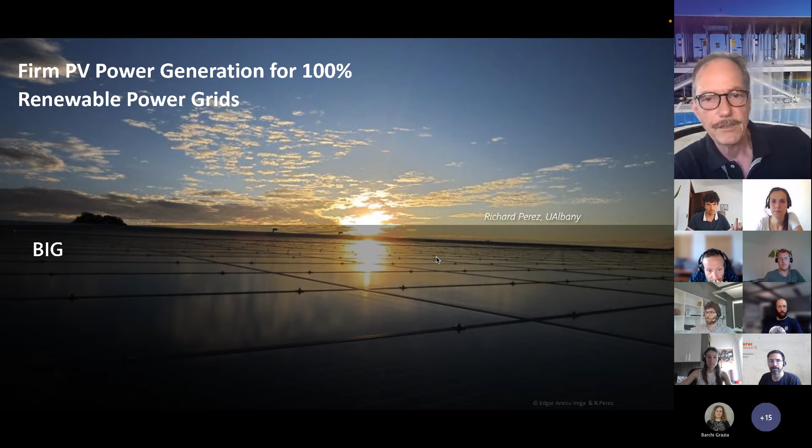Yes. Okay. So firm PV power generation for 100% renewable power grids. And I'll summarize that in 3 words. Solar is big, PV is a big resource. It is getting to be very inexpensive, and most importantly, it's a resource that can be made available all the time, at night and in winter.

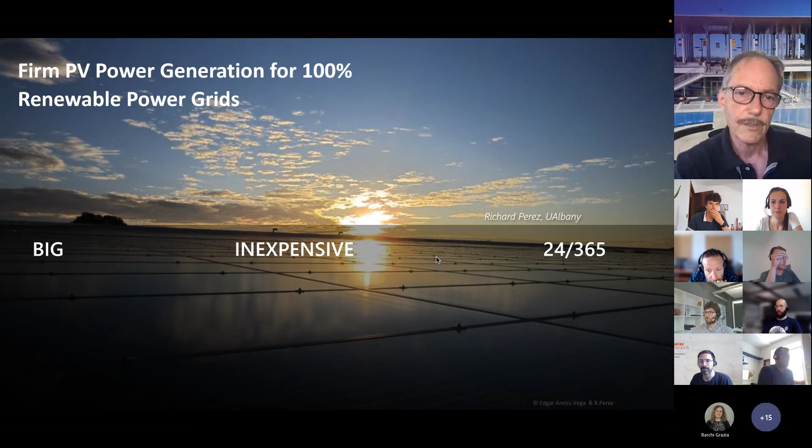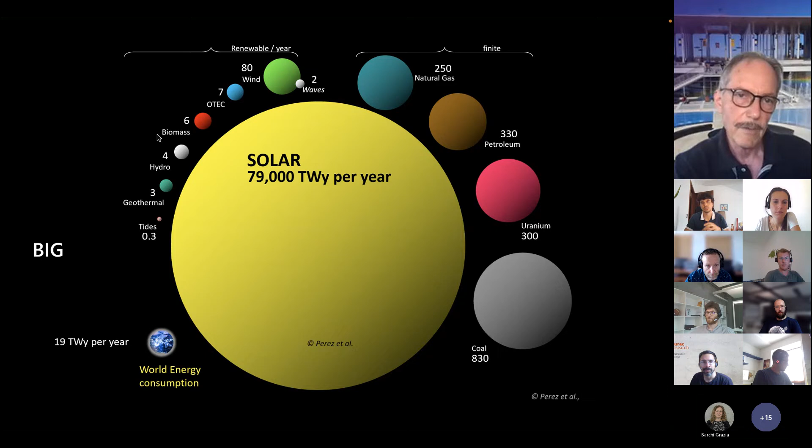So big, if you compare the energy reserves of the planet, you see that solar is so much bigger than the reserves that we have for conventional resources on the right that power the economies of the world. And it's also much bigger than all the renewables, which happen to be byproducts of solar. So PV can do the job. There is enough. There is more than 4,000 times enough to power our consumption, which is illustrated by that little blue sphere here. So no problem, it's big.

This is a chart I like to look at. It's published by the Lazard Bank every year, but Bloomberg has something similar where they compare the levelized cost of energy for all resources capable of making electricity. And PV is getting very cheap. On the x-axis is the unsubsidized cost per megawatt hour. If you are used to cents per kilowatt hour, you divide that by 10.

And utility scale PV is among the least cost. If I draw a line here, it's considerably cheaper than new plants of conventional generation, gas peaking, nuclear. Everybody's talking about nuclear in Europe, but it's way too expensive, in my opinion. It's cheaper than coal and even cheaper than combined cycle new generation. It's roughly the same price as fully depreciated plants where you only pay for operational costs. And we are not finished there yet. By 2035, if I take the IEA or Bloomberg predictions, we're going to be right here.

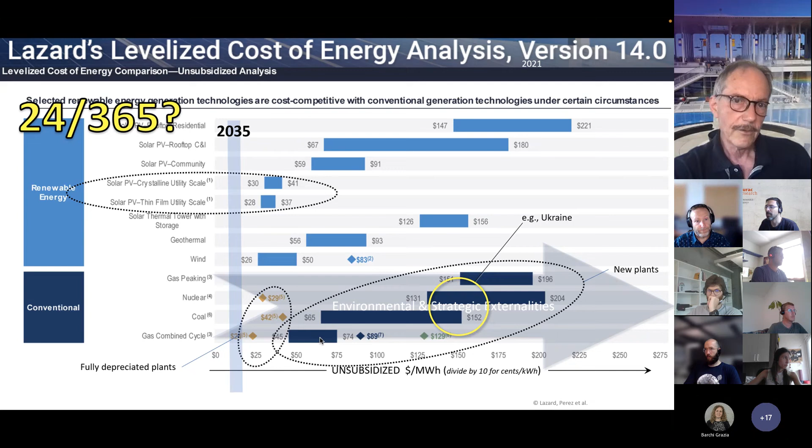But what about 24/365? Because that comparison is not 100% fair. The conventional resources are dispatchable, available on demand, and PV is run by the weather, so it's not available all the time. PV is intermittent, and what we need on the power grid is something that's firm and dispatchable to meet the load all the time.

As a result of that intermittency, PV and wind, for that matter, occupy a marginal position on the grids. What I mean by marginal is this. This is the electrical demand. That's the one of New York City in winter, but it could be any TSO on the planet. And if I operate PV, it operates at the margin. It still floats on a sea of baseload and dispatchable generation to enable it.

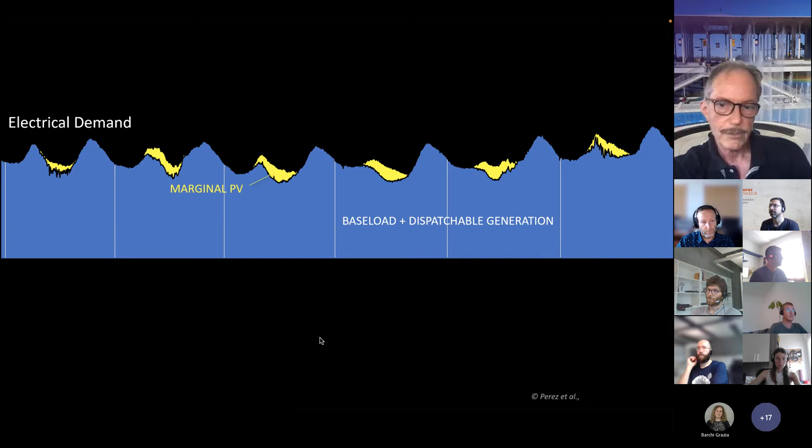And as we grow PV, it remains marginal, and the job of the baseload and dispatchable becomes harder. You need much better forecasts to make sure that everything's balanced, and you need to take care of steeper and steeper ramps, manage the weather. But it's still a marginal approach. You've all heard about the famous duck curves that are growing, started in California, but now spreading all over the planet. And that's only the tip of the iceberg. That's a small part of the problem, what happens within the day.

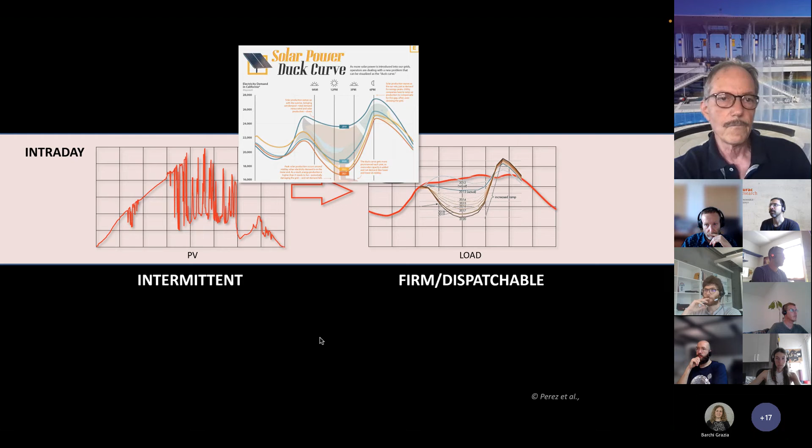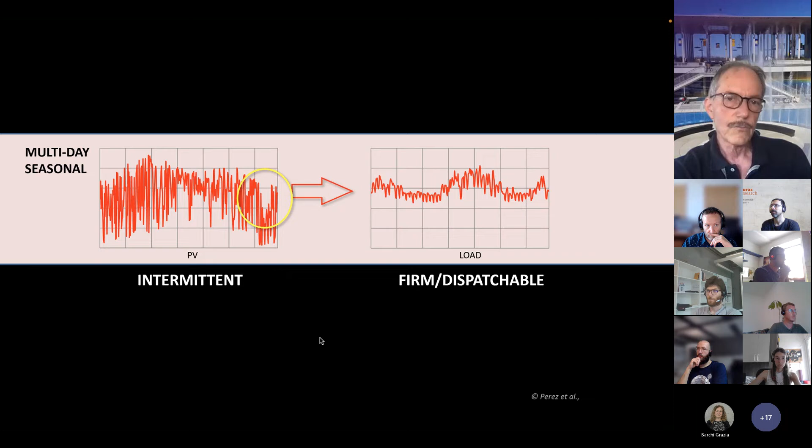The bigger part of the problem is multi-day and it's seasonal. So this is also New York City: on the left is the PV output on a daily basis, and on the right is the load of the city. And you see that there are big holes to manage. So how do you make that switch? How do you make PV 24/365? So how do you go from the margin to a grid dominance of PV? How do you do that transformation?

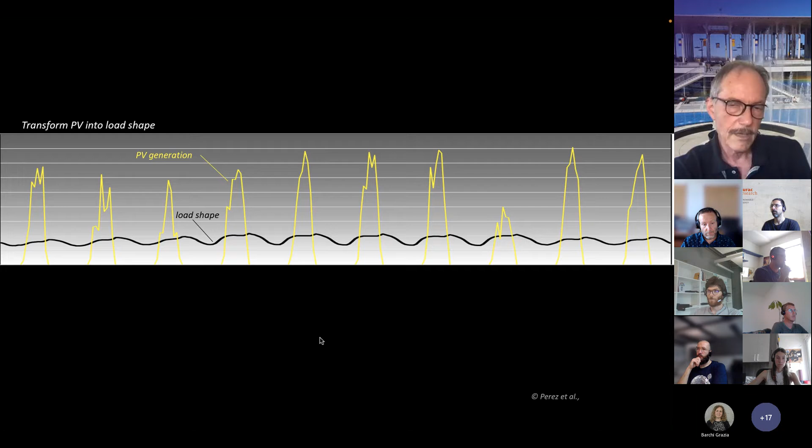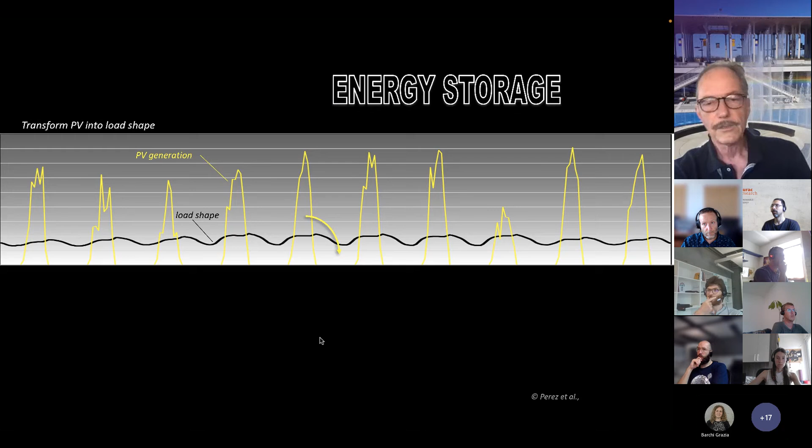So physically, it's conceivable. You have to transform PV into load shape. So you have to make the yellow into black. The black is the load, the yellow is the resource. And energy storage in a physical sense works for that very well. When you have excess, you put it into storage, and when you need the power, you take it back from storage.

Storage technologies are evolving pretty fast, and I like to regroup them. Here it's a plot of power and discharge time for all storage technologies that we could identify, and I like to regroup them into three major groups. The big one, macro mechanical, like compressed air and pumped storage hydro, all the way to the right, PSH. In the middle range, you have all the electrochemical, aka batteries, and then you have the fast response units that only provide power for a few minutes or seconds, like flywheels and magnetic storage or supercapacitors.

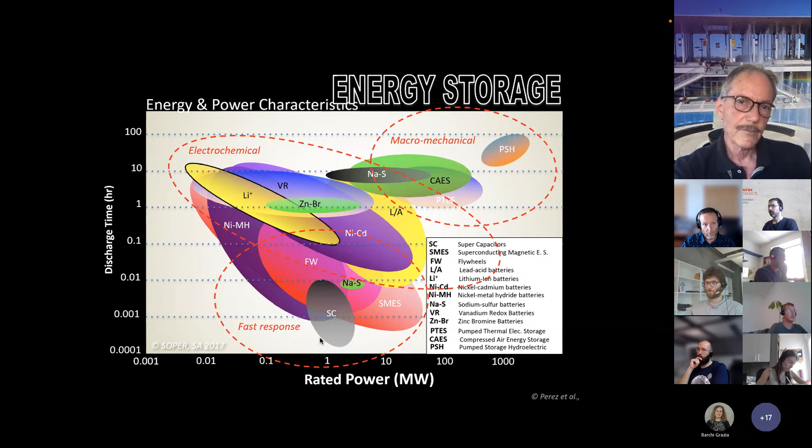And I will single out lithium ion, which has been growing very fast and getting cheaper, and everybody predicts it's going to get much, much cheaper. So it's on all your smartphones, your laptops, and now in most electric cars, that's what it's based on. So it's evolving really fast. But as inexpensive as it's expected to be 20 years from now, it's still going to be too much to do the job of transforming on a yearly basis PV to firm dispatchable.

So we know the intermittent PV is very cheap from the Lazard reports, but making it 24/365, even if I project the cheapest cost that I can in terms of projection for lithium ion in 20 years from now, it's still going to be too expensive. It's going to be very expensive to make a kilowatt hour. And all the difference is because I need so much long-term storage to do the job.

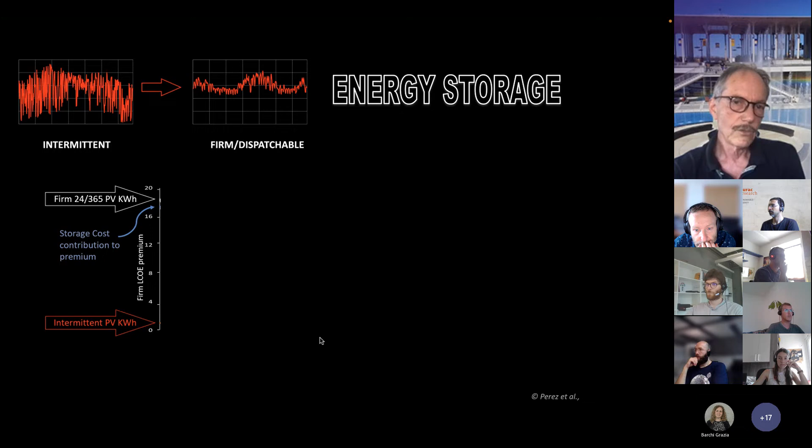But if you think a little bit outside the box and you do something that has been counterintuitive and that's been an anathema in the PV deployment business until very recently, if you build more solar than you need and you curtail a good fraction of it, you throw away some of the output, then something interesting happens.

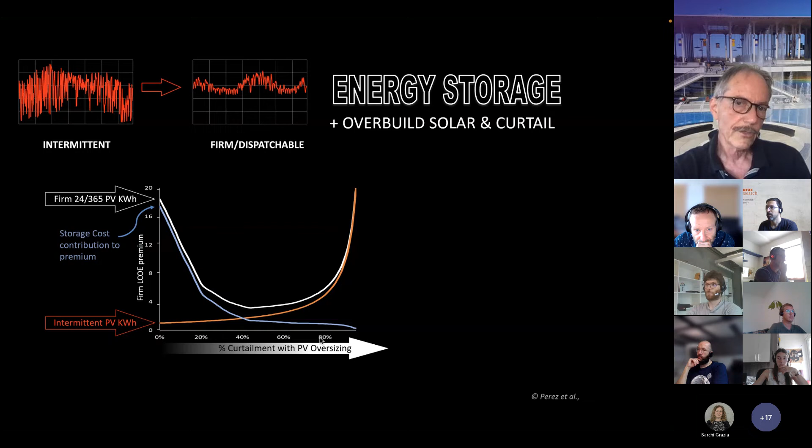Here on the x-axis, I have the amount of oversizing of the PV, so the part that I'm not going to use. You see the firm power, the white line, the LCOE goes down, reaches a minimum. PV goes up because you oversize it and you're not monetizing the entire PV, but the cost of storage can go very, very much down until you reach a point that's almost manageable, where you can actually consider, yes, I can do it. I can do 100% PV because I'm much, much cheaper than if I don't think outside the box.

That overbuild and curtail is so effective that we started calling it implicit storage, and many others are calling it that way as well, because it does the same job as storage. It's a catalyst to storage technologies and can do it much, much cheaper. You will still need storage. You don't eliminate it. You need it for night, but you can minimize it.

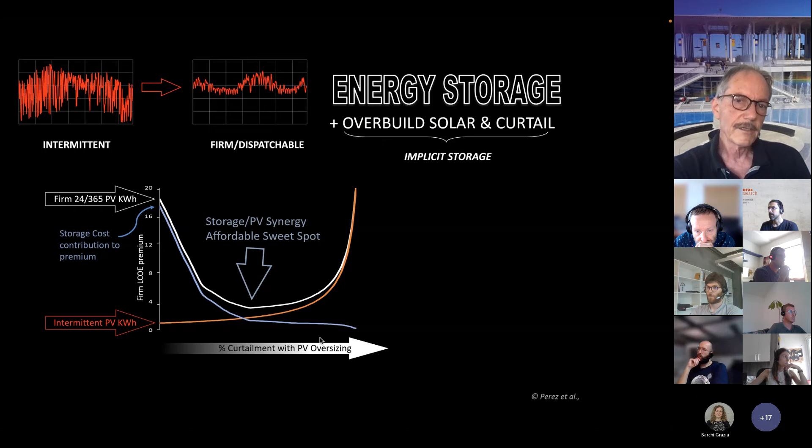And the press, this is an article from Quartz Business Review, is catching up on it. And they quoted us, solar energy is so cheap that it can be wasted. They should have written, it must be wasted, not can. It must be wasted if you want to reach the least cost.

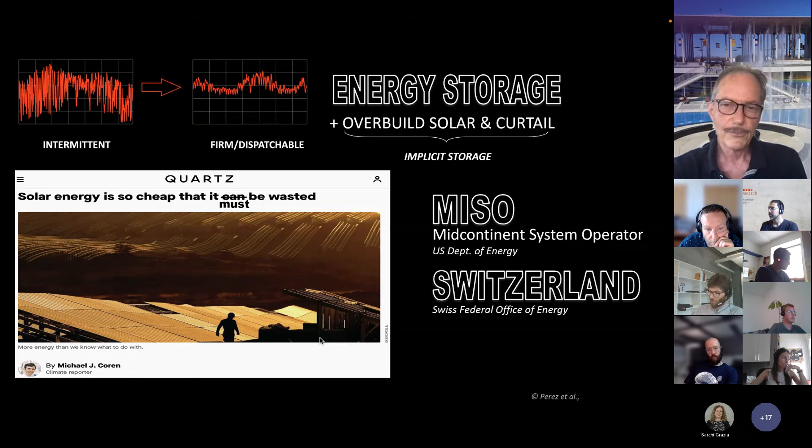And I'm going to illustrate that quantitatively with two projects we completed. One is for the Mid-Continent System Operator. That was a US Department of Energy contract. And another one we're just finishing now, just north of you guys, very close, in Switzerland, financed by the Swiss Federal Office of Energy.

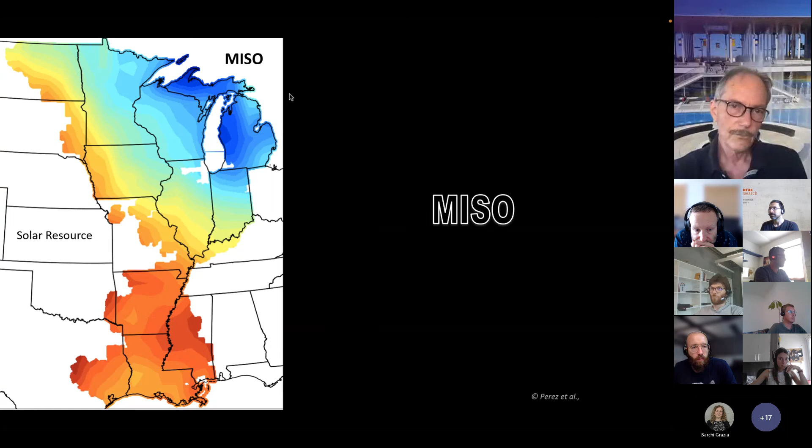And that study was called Minnesota Solar Pathways and financed by the US Department of Energy. The objective was to analyze whether we could do 100% renewables with an optimum mixture of PV and wind. And wind is a very different resource, also very much like Europe. Wind is much, much stronger in the north than in the south.

We looked at the impact of geographic distribution of resource. Do you have to interconnect the whole region to get a cheap price, or can you live with smaller regions? And we looked at the impact of the technology costs, how the cost of PV, wind, and storage influence the bottom line.

And we looked at, I'm going to show two of the extremes that we looked at, near future, with low technological development, with PV at a little over $1,000 per kilowatt, so pretty much what it is today. Wind at $1,500 per kilowatt, and storage at $175 per kilowatt hour, which is pretty much the cost that Chevrolet and Tesla currently pay for their batteries in their cars.

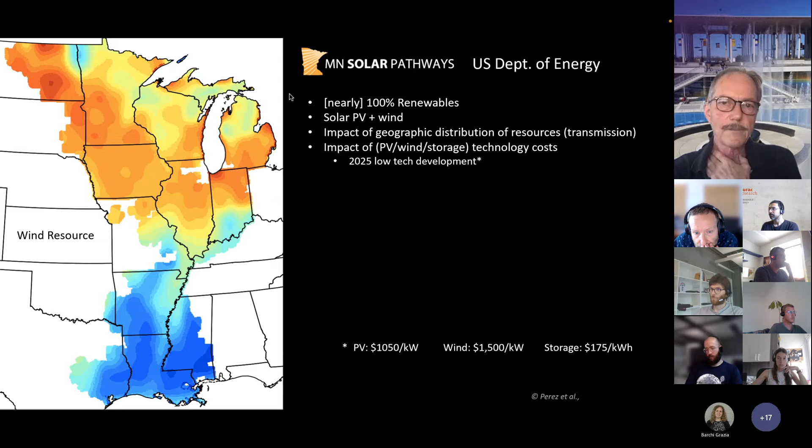At the other extreme, we looked at the distant horizon, 2050, with high technological development, where PV would be at 360 per kilowatt, wind down to 800 per kilowatt, and storage all the way down to 40 per kilowatt hour. So almost on par with the pumped hydro in that respect for the batteries. And finally, we looked at the impact of flexibility. If you were to keep just a little bit of supply side flexibility with natural gas, so not shutting them all off and using them just when you need, how does it affect the bottom line?

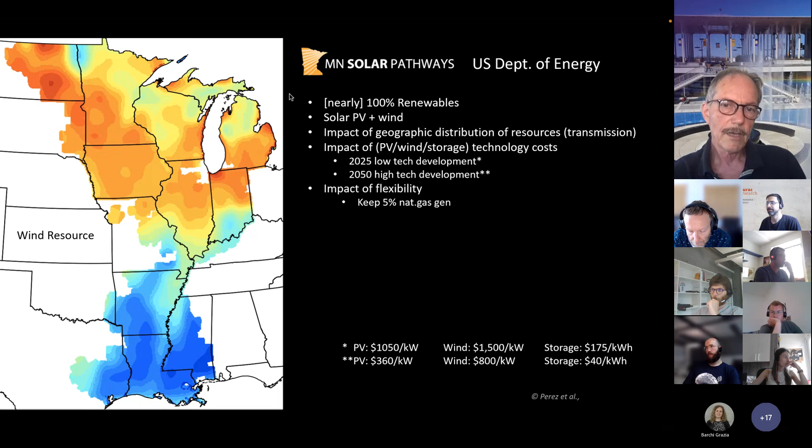Some characteristics of MISO: 120 gigawatts, 670 terawatt hours per year. That's just about twice what you have in Italy. There is not much renewable installed. There is quite a bit of wind, 21 gigawatts installed, but very little PV so far in the region. The geography includes 3 macro electrical regions and 10 smaller load balancing regions. The resource is vastly different in those regions.

This is Iowa region, where I have the capacity factor. Capacity factor runs from 0 to 100. 100 means the resource is available all the time, runs all the time. 0 means it's never available. So solar has a typical peak in summer in that northern region, maybe a little lower than Italy, but not much lower. Wind is extremely strong in that region. Peaks in winter, lower in summer, but it's very high. It's called the Saudi Arabia of wind, the Great Plains of America here. Tons and tons of wind.

If I go down the Mississippi River, down to Louisiana, the wind dies off. It's very small. The solar is just a bit higher, but still quite a bit of clouds. It's very flat throughout the year, except maybe in the late winter.

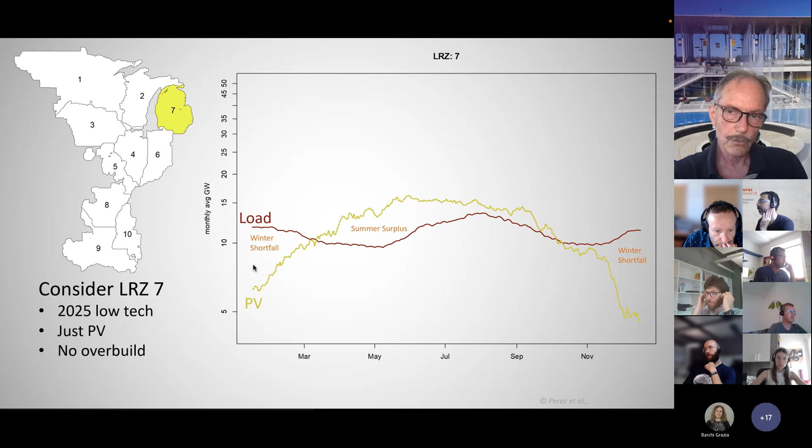So let's focus on one region and work step by step. Let's first do low technological development, short-term future, just PV, and let's not overbuild the resource. Let's try to conserve every kilowatt hour we have. That's the load in that region, and that's the PV resource. So you can see that they are largely out of phase, big shortfall in winter and surplus in summer. And that's what the bottom line would be, 177 cents per kilowatt hour, $1,800 per megawatt hour, way too expensive, totally unacceptable.

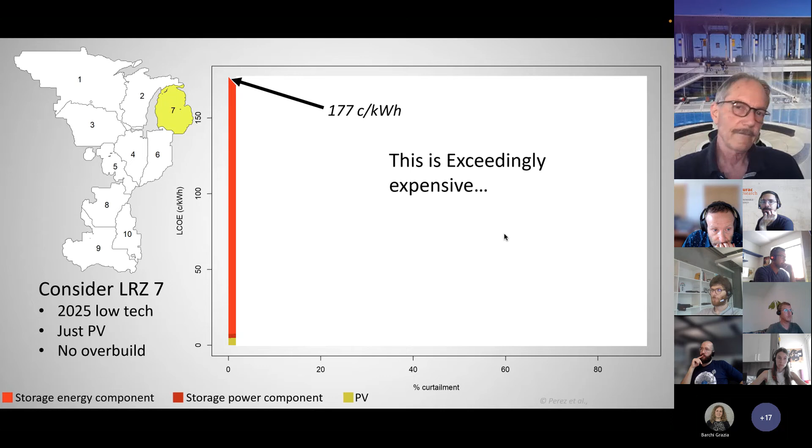That's the view. Most people, they stop there. They see this number and say photovoltaic will never work. It's way too expensive. And if they stop there, they're right. But if you just say, now I'm going to optimally overbuild, even with current prices, I'm getting down to something that's closer to acceptability. It's still a bit expensive, but it's much closer to reality. The contribution of that is all that implicit storage. That green area here is the PV power that is wasted, that doesn't contribute energetically, but contributes a lot economically.

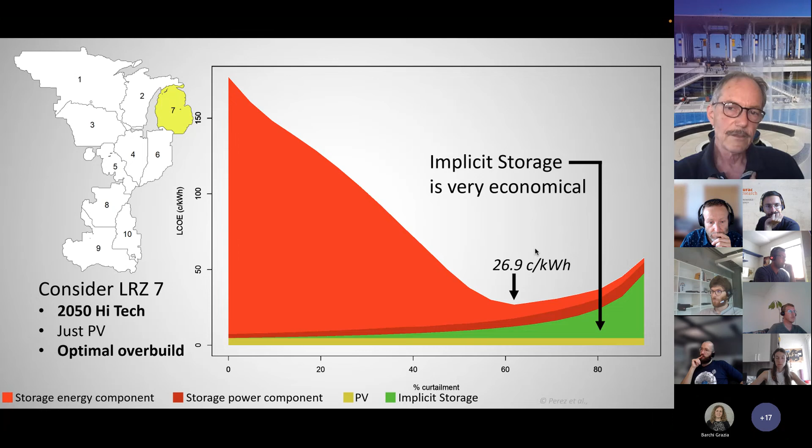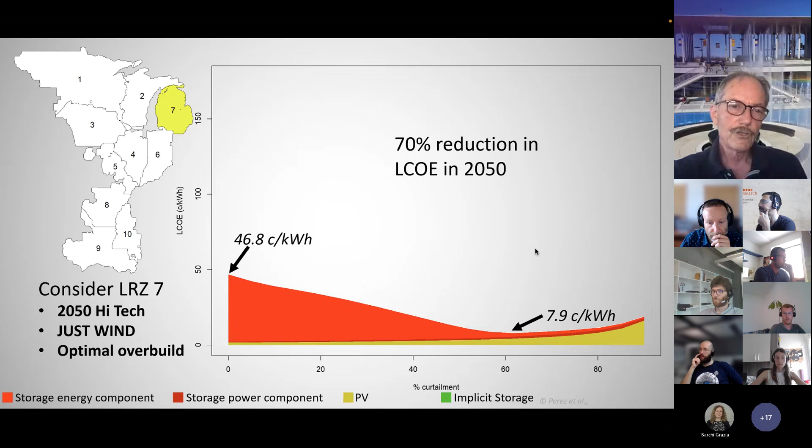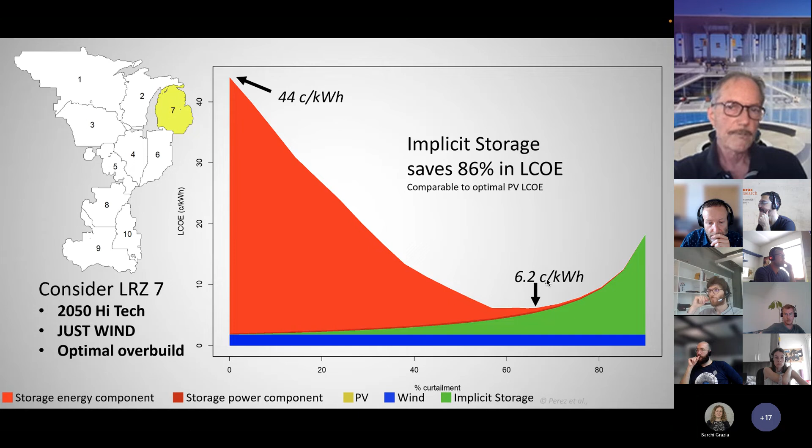Now, what if I blend them together? If I do an optimal mixture of both, then I'm getting really close to reality at 4.7 cents per kilowatt hour, and I need to curtail quite a bit less.

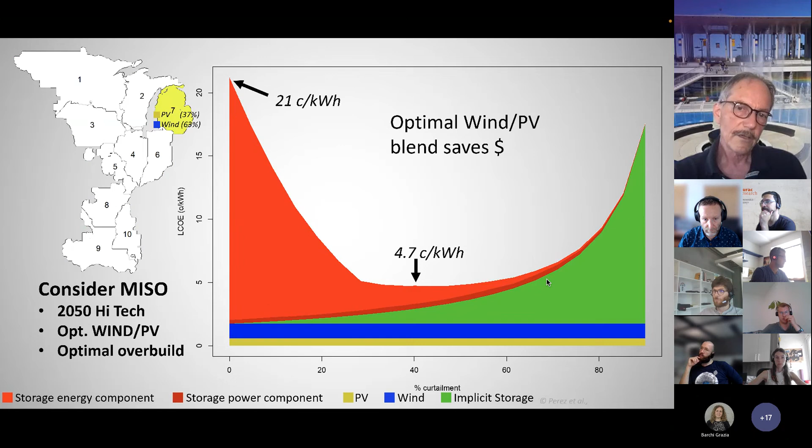Now, if I were to spread the resources, not in just one region, I interconnect everything, and I do my blending and take advantage of the lower variability because I have a much larger resource. Interestingly, I go down in costs, but not all that much. That's an important finding. You gain a little bit by connecting that whole middle section of the US, but it's not black and white. Interestingly, the mix turns out to be much more PV than wind if you do that.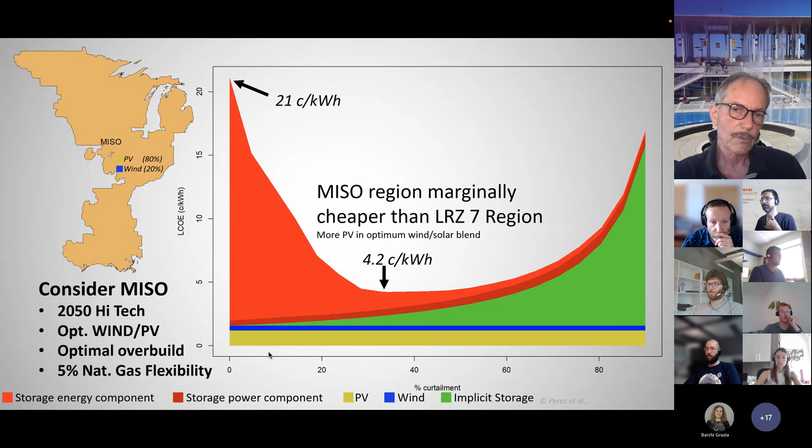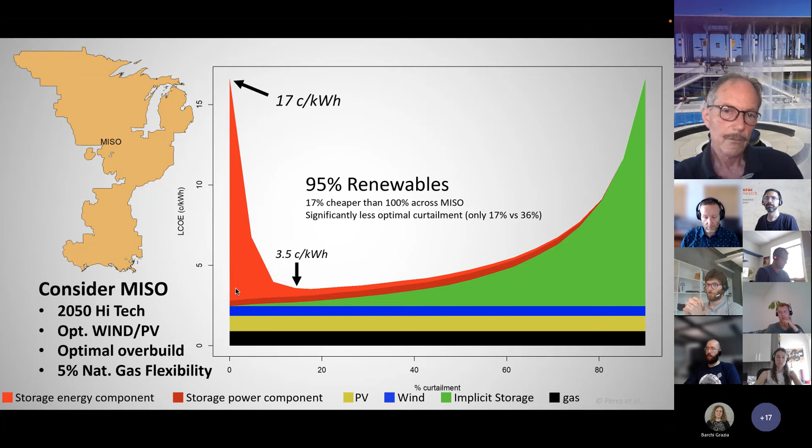Now, what if I bring some flexibility with supply-side natural gas to use just when I need it? Then I really make the numbers much better. So the jump from 100% to 95% renewable is very economically strong and effective. I get down to cheaper than the price on MISO today. That's one of the cheapest in the US because they use tons of coal today. They don't pay for the externalities. I think the MISO price averages between 3 and 5 cents per kilowatt hour, and we can get below that with almost full PV and wind.

So the key takeaways from that MISO study are that the intermittency at ultra-high penetration can be overcome economically with an optimized technological portfolio, including an optimal blend of wind and PV, application of storage, both real but most importantly implicit, aka overbuild and curtail. Large-scale interconnection is cheaper, but it's not indispensable. Smaller subregions are slightly more expensive, but provide resiliency benefits and are likely to be much easier to implement.

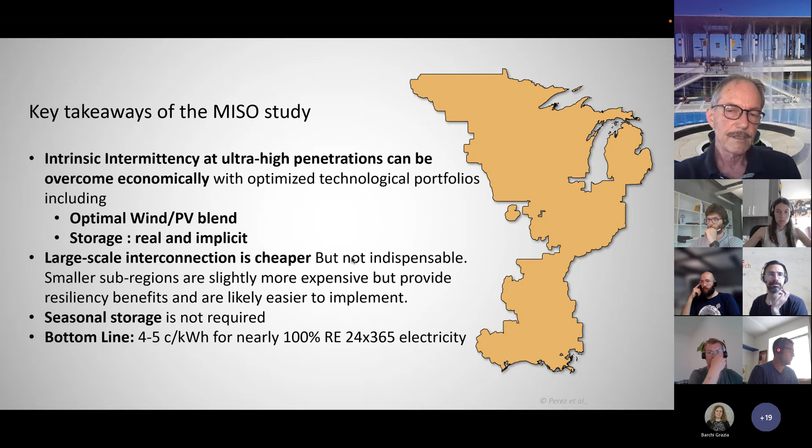Seasonal storage is not required. That goes against the grain of planning that I hear in the US and also in Europe: you need seasonal storage. In that case, we found out you don't need it. You only need a few hours' worth of battery storage to supply the output when you need it. Bottom line is that you can do 4 to 5 cents per kilowatt hour for nearly 100% renewable 24/365 electricity in central US. Now let's move to Switzerland.

So this was paid for by the Swiss Federal Office of Energy, and we worked together with Meteotest from Bern on that. The objective also is to explore 100% renewables, but in that case, that would be more solar and hydro, because you cannot develop all that much wind in Switzerland, so they cannot take advantage of that natural out-of-phase relationship between the two resources. All we have to work with is hydro, and they have good hydro. We also explored the impact of PV and storage technology costs, and the impact of bringing flexibility with some dispatchable generation.

So that's the PV resource in Switzerland. So this is actual. It's all the systems in Switzerland operating in any given year. They have a tough job because the difference between the summer and the winter is almost 1 to 8. So they have a very difficult case to make with almost no PV resource from November all the way to March. So tough job. That's the current dispatching of energy on the Swiss grid. I run here a 15-day average, so you can see I remove all the spikes up and down. So that's a 15-day running mean.

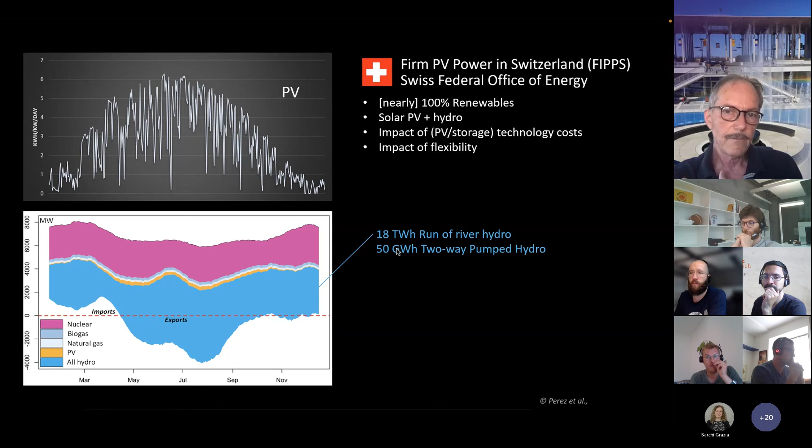There is a substantial two-way pumped hydro system, 50 gigawatt hours worth of pumped hydro. And there is a big one-way buffer hydro system. So there are lakes that can be dispatched on demand, and that's quite a large quantity of energy that they have in these lakes. And it will help PV tremendously in that case.

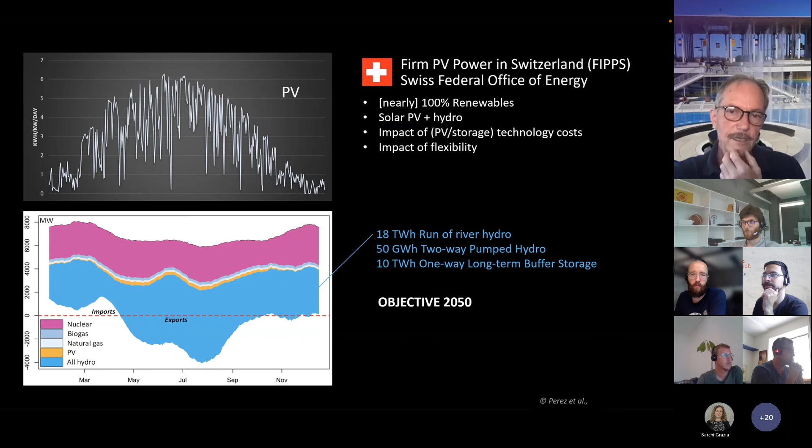The objective we're analyzing for 2050: full nuclear phase out, so no more nuclear, so find 33% of the generation and replace it by something else, and at the same time add another 30% to the load due to electrification. So it's a double whammy. You get rid of 30% on one hand and you add another 30% on another hand.

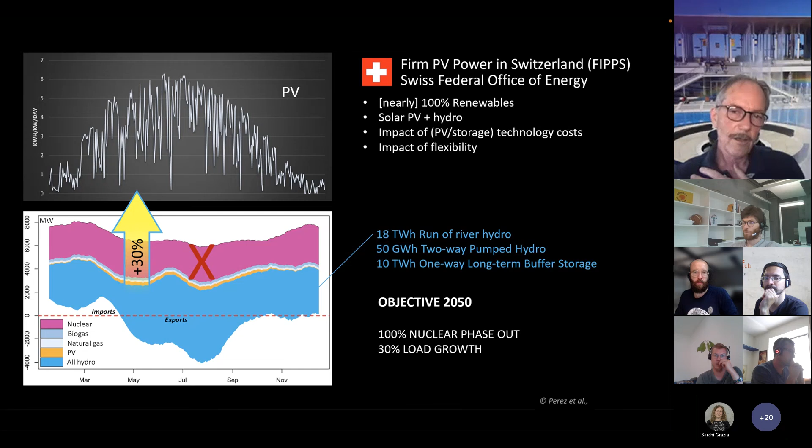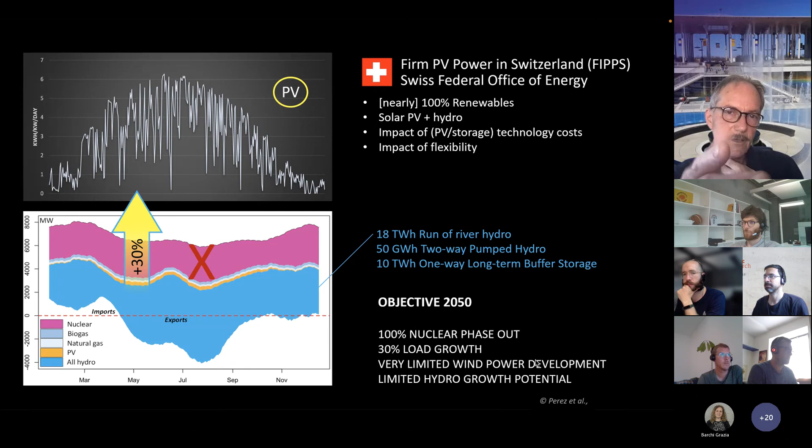You cannot do that with wind because there is not much space to develop wind, just only a little bit. And you cannot grow the hydro. You have to take what is here. You can make the barrages just a bit higher, but at most you're gonna grow the hydro by 5 to 10% of what it is now. So the job is on PV to make the difference. So can PV do it with that shape?

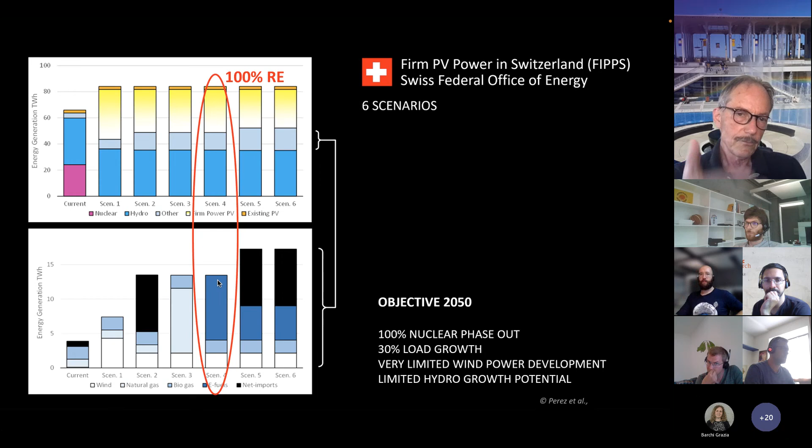So e-fuel is regular fuel like methane or methanol that's made purely with PV, hydrogen, and carbon capture. But it's highly flexible. We have 2 technical cost assumptions for the renewables: small-scale systems at 860 Swiss francs per kilowatt, roughly the same as a euro or a dollar, and $330 per kilowatt hour for battery storage. And then we have a large utility-scale system on the other hand with much cheaper prices for PV and storage, comparable to the US long-term numbers that I showed in the MISO.

These are the other inputs to the economic optimization. So we have e-fuels, very expensive generation, 20 cents per kilowatt hour. We have biogas, quite a bit cheaper. It's already running at that price. And wind, quite expensive in Switzerland, 12 cents. But there is not much wind to speak of. It's only that tiny fraction, that gray space here.

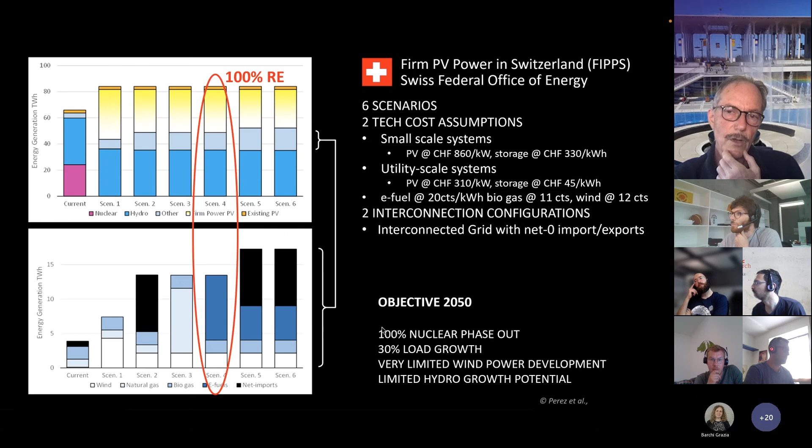And we are looking at two interconnection configurations for the grid. One continues to be interconnected to the larger European grid, but with net zero import/export, except in those scenarios. And another one, where we run the grid totally cut off from the rest of Europe. It's an autonomous fortress Switzerland. No more connection, operate standalone.

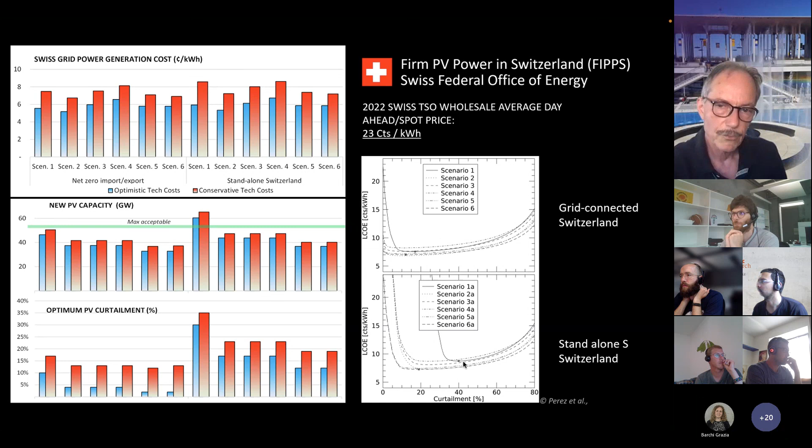So physically it looks feasible, and this would be the optimum curtailment, the amount of PV power that would have to be thrown out, not used in each of those scenarios. So for some scenarios, it's very little overbuild and curtailment. Some others, especially the fortress Switzerland, the standalone Switzerland, you'd have to throw out quite a bit of the output. These are those sweet spot curves that we developed for every scenario. I'm not going to dwell on that, but each scenario was determined to reach the optimum solution.

So the key takeaways from that Swiss study are PV can meet the challenge of meeting 30% higher demand while phasing out nuclear, currently supplying 1/3 of the demand. The intermittency at ultra high penetration can be overcome economically with an optimal technological portfolio, including optimal PV and hydro operation, both storage, just like in the MISO study, real and implicit. E-fuel thermal generation, although very expensive, plays a pivotal catalyst role. So it should not be discarded. As expensive as it is, it opens the key to get overall very low cost.

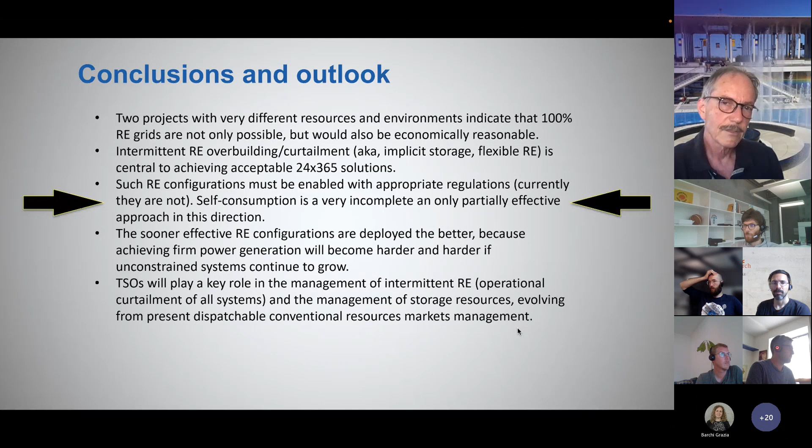And this one, I think, is the most important. Enable smart systems to come online. So we don't